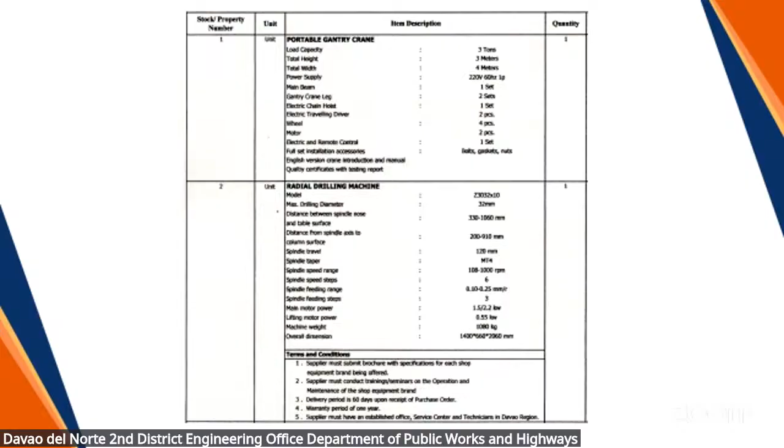First is the portable gantry crane and the radial drilling machine. So for the portable gantry crane, its specifications: for the load capacity, 3 tons, total height 3 meters, total width 4 meters, power supply 220 volts, 60 hertz, 1 phase. The main beam is 1 set.

The gantry crane leg, 2 sets. Electric chain hoist, 1 set. Electric traveling driver, 2 pieces. For the wheel, 4 pieces. For the motor, 2 pieces. Electric and remote control, 1 set. Full set installation accessories: bolts, gaskets, and nuts. The English version crane introduction and manual, and quality certificates with testing report.

So this is the example of the portable gantry crane. Second, for the radial drilling machine, specifications: model Z3032 by 10, with max drilling diameter 32 mm.

The distance between the spindle nose and table surface is 330 to 1060 mm. The distance from spindle axis to column surface is 200 to 910 mm. Spindle travel 120 mm, for the spindle taper MT4. Spindle speed range 108 to 1000 RPM, spindle speed steps 6. The spindle feeding range is 0.10 to 0.25 mm per revolution, spindle feeding steps 3. Main motor power 1.5 or 2.2 kilowatts, lifting motor power is 0.55 kilowatts. The machine weight is 1080 kilograms, and the overall dimension is 1400 by 660 by 2060 mm.

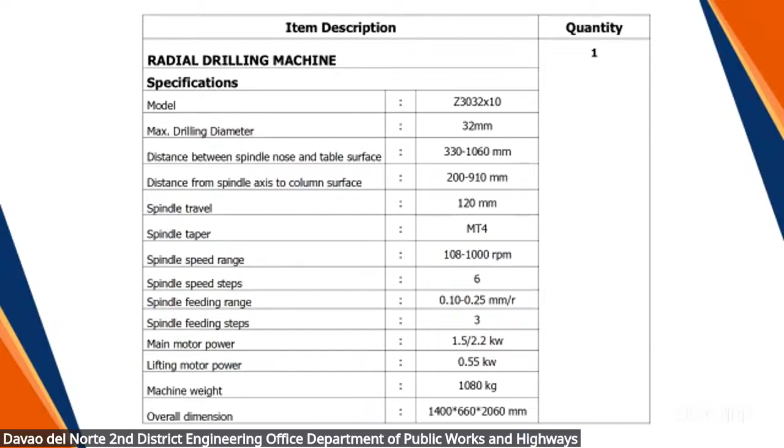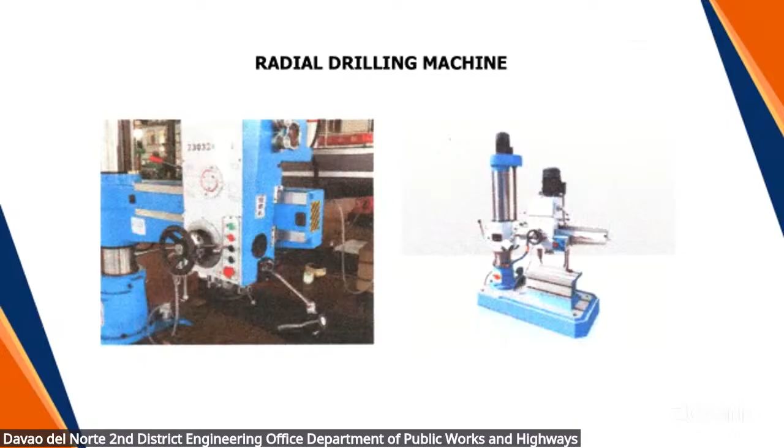This is the example of the radial drilling machine. So for the terms and conditions: first, supplier must submit brochure with specifications for each shop equipment brand being offered. Second, supplier must conduct trainings and seminars on operation and maintenance of the shop equipment brand. Third, delivery period is 60 days upon receipt of purchase order. Fourth, warranty period of 1 year. Last, supplier must have an established office, service center, and technicians in Davao region. That's all, sir.

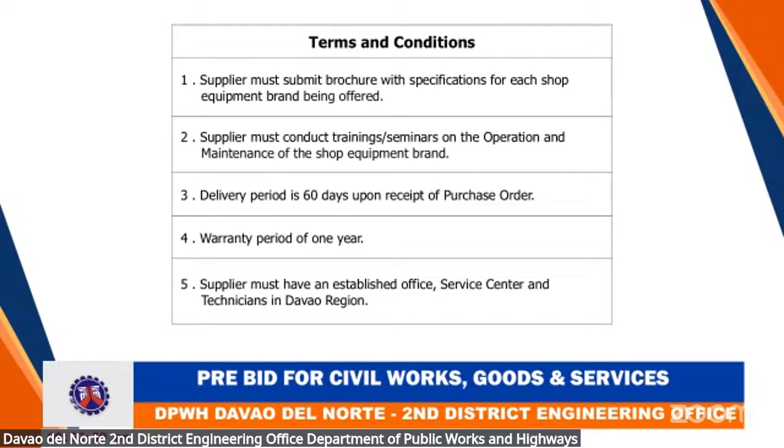Thank you for the presentation, sir. We have prospective bidders who are attending us online. So do we have any queries from our prospective bidders and the members regarding the rest of the contract project? Hearing none, thank you very much. Let us now proceed with the reading of the reminders for our prospective bidders.

The bidding documents were posted on the DPWH website and PhilGEPS. Changes will be posted in the Bid Bulletin and Notices.

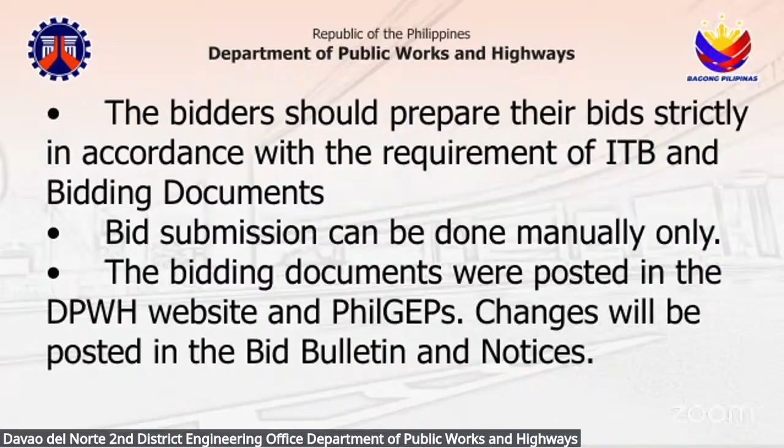For eligibility requirements, the basic eligibility requirement during the submission of bids is PhilGEPS. All bidders are reminded to maintain a current and separate file of their Class A documents in the PhilGEPS, and shall submit the PhilGEPS certificate of registration and membership to the procuring entity. Please be reminded that submission of updated Class A documents in its bid to support an expired certificate of PhilGEPS registration and membership is no longer acceptable.

For technical and financial requirements, the required documents enumerated in the checklist must be submitted. All notarized documents must be dry sealed and signed by its authorized signatory. Bid security must follow the required format and should be duly signed, notarized, and dry sealed. All data should be filled up, don't leave any blank in the form.

The bidder shall not change the entries under pay item number, pay item description, unit, and quantity set by the procuring entity in the financial proposal, to avoid being declared non-responsive. The Omnibus sworn statement shall follow the prescribed format. Any missing, incomplete, or patently insufficient document in the checklist is a ground for outright rejection of the bid.

The technical proposal shall comprise the following documents: field checks, statement of all ongoing contracts, single largest completed contract, technical specifications including delivery schedule, warranty certificate and brochure, manpower requirements if applicable, and after-sales support for parts.

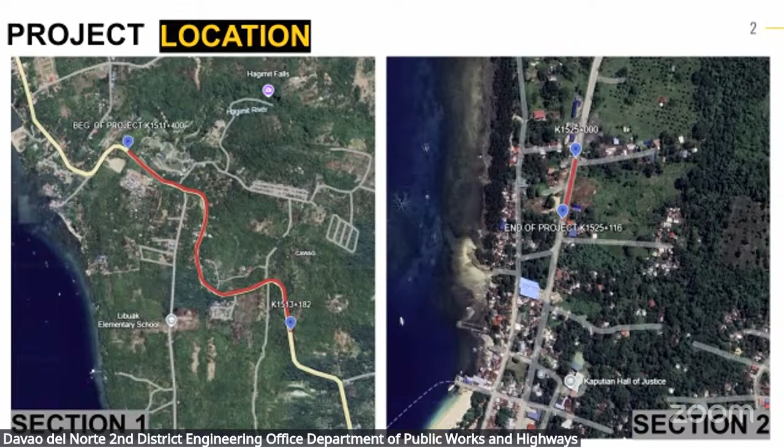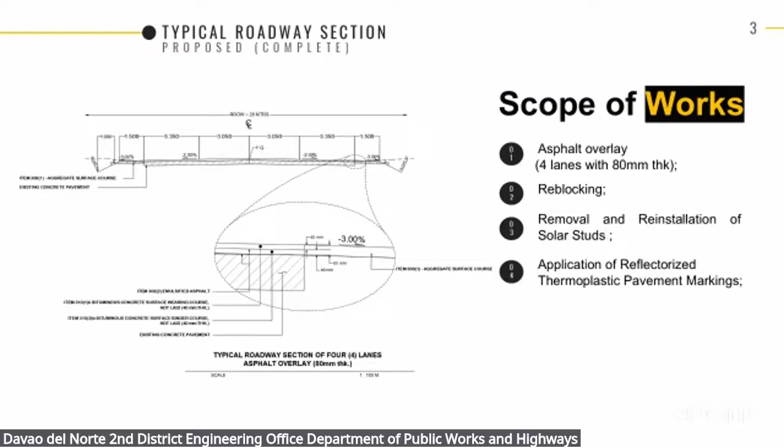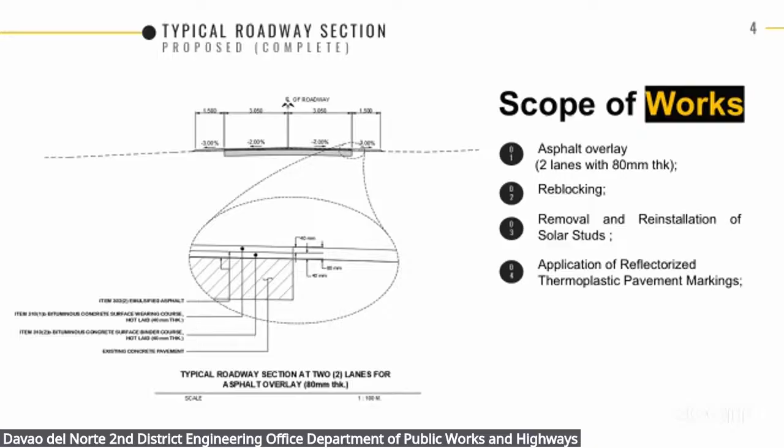Queries, comments from the members and the prospective bidders? Getting none, thank you very much for the presentation. We will now proceed to the next topic.

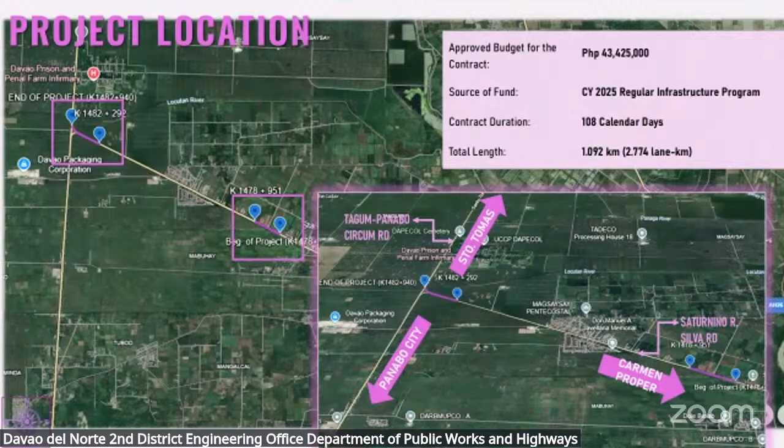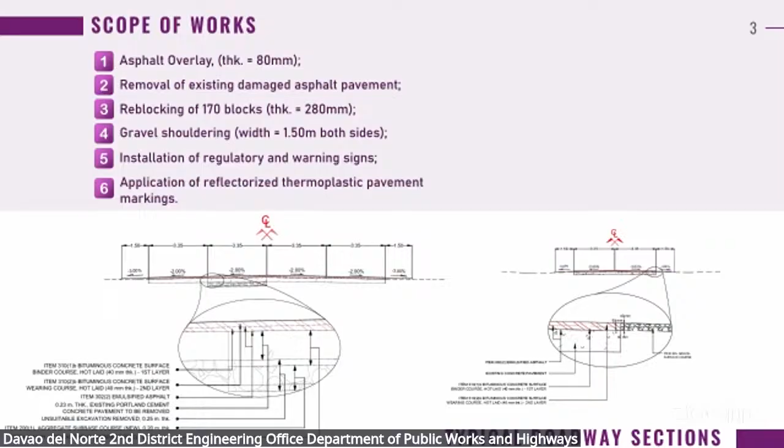And this is a typical roadway section. These are the total photos for the Saturnino-Silva road project.

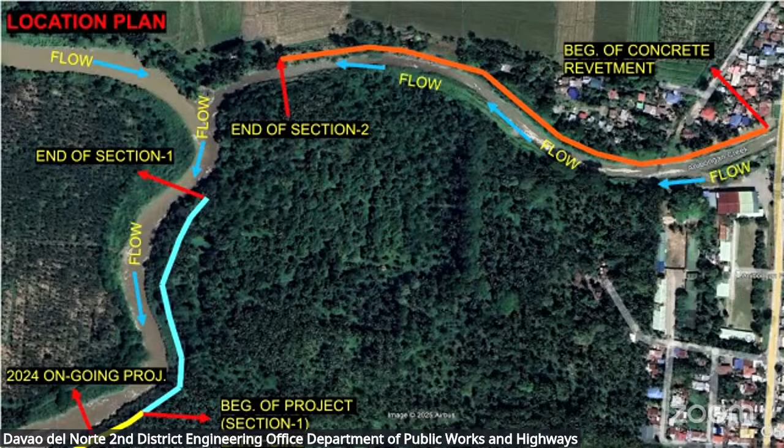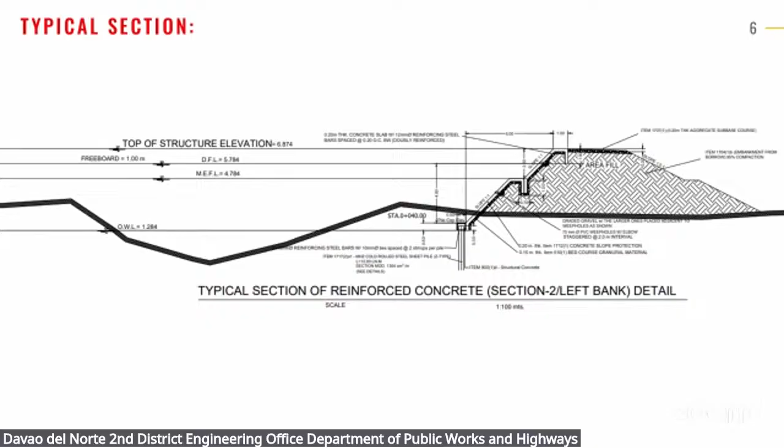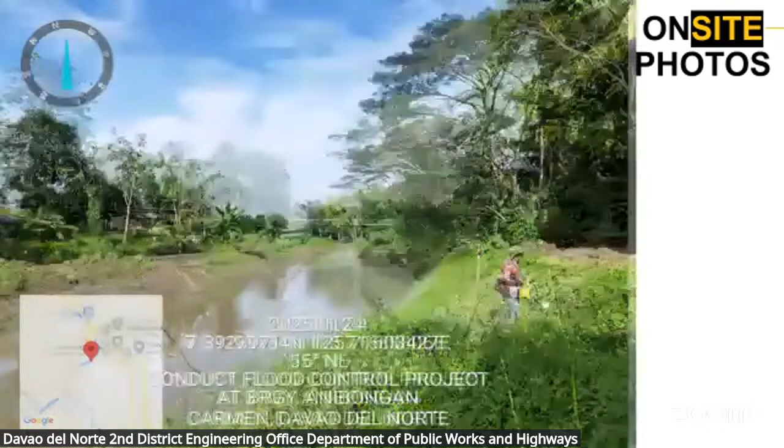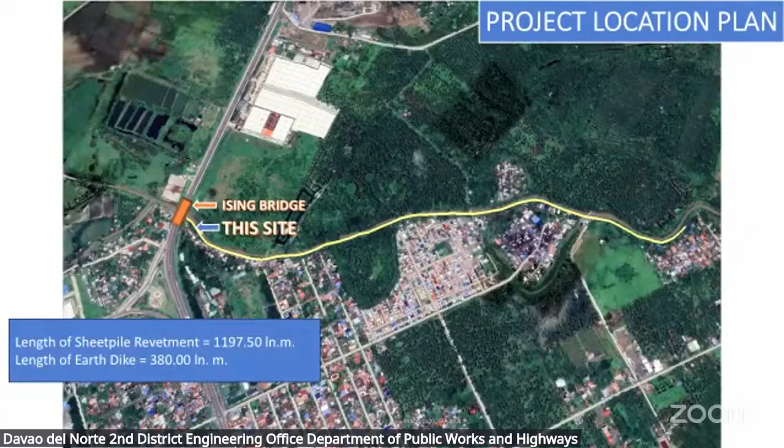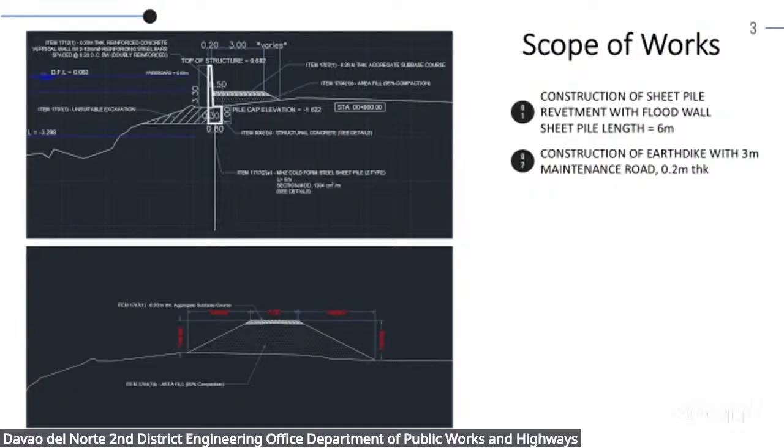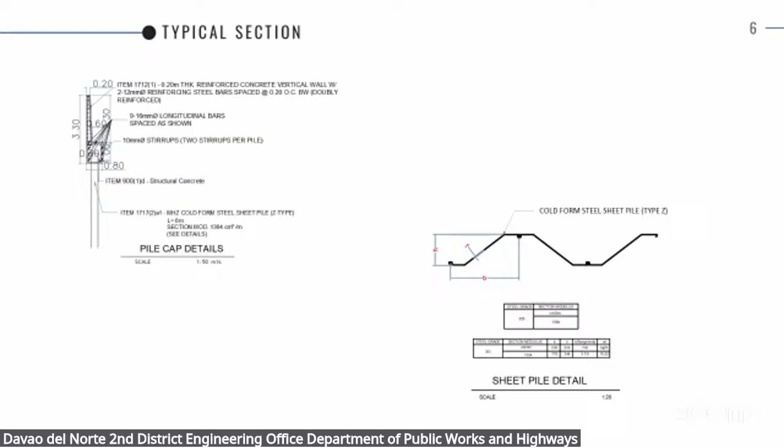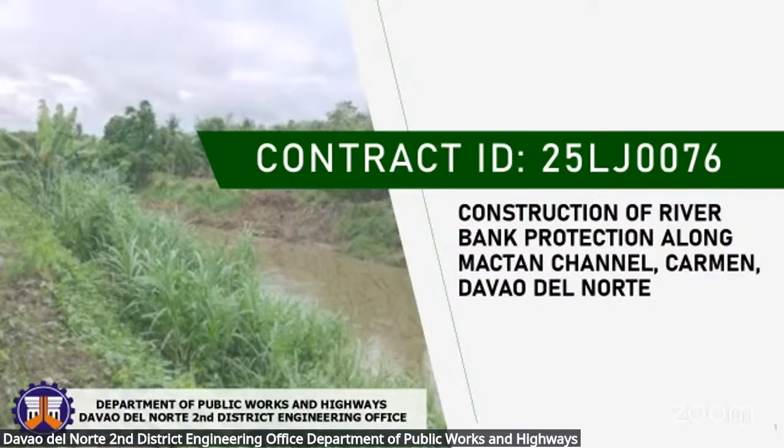Good morning, Mr. Chair. Good morning everyone. I will be presenting contract ID 25LJ0076: construction of river bank protection at Mactan, Carmen, Davao del Norte. So the ABC is 144,750,000. Source of fund is CY 2025 regular. Contract duration is 207 calendar days. Target length is 1,467.45 linear meters.

Scope of works: provision of 4x4 pickup type service vehicle for the engineer on bare rental basis, operation and maintenance of the 4x4 pickup type service vehicle for the engineer, construction survey and staking, project billboard and signboard, occupational safety and health program, mobilization and demobilization, removal of structures and obstruction, unsuitable excavation, shoring, cribbing and drain excavation, embankment from borrow, driving of Z-type sheet piles 12 meters, and construction of concrete slope protection.

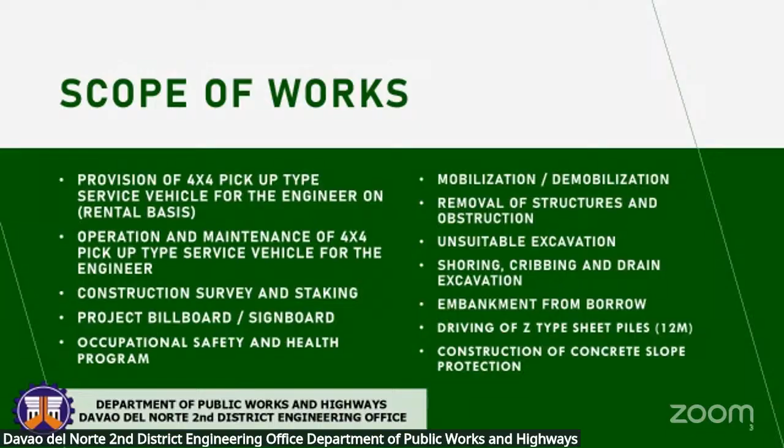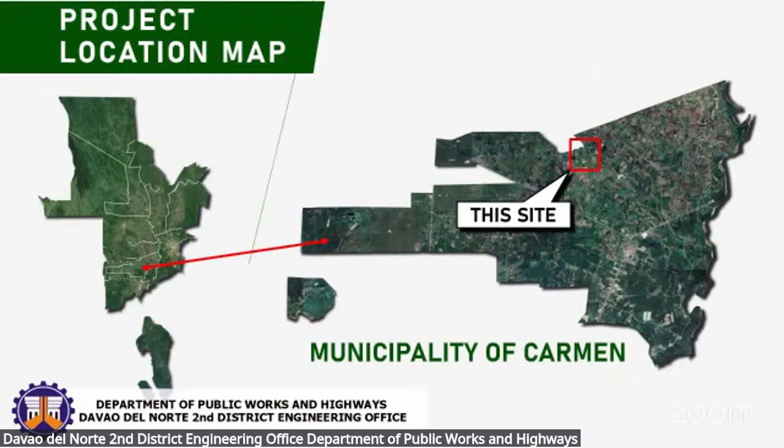So the location of the project is located in the municipality of Carmen. So this is the project location map. So for the project, the beginning of the project, yes.

Beginning of the project is section 1, beginning of project, represented at station 0+00. And the end of section 1 is the end of concrete revetment. Station 0+514.5 is also the beginning of section 2 and beginning of earth dike. And the end of section 2 is at station 1+040. And the beginning of section 3 is at station 1+280. The end of project is at station 1+507.45.

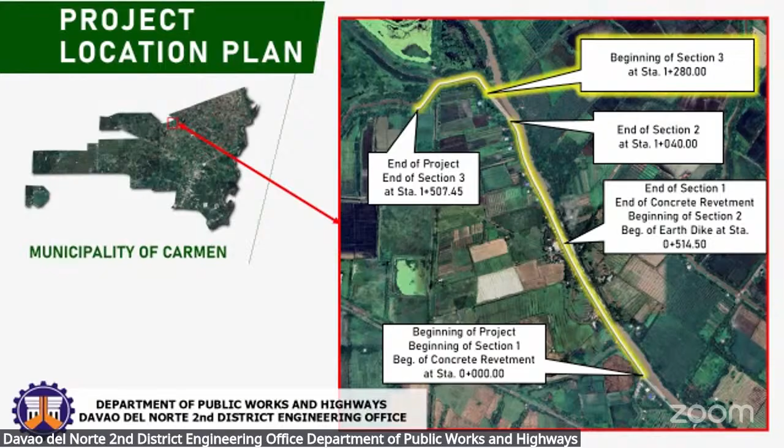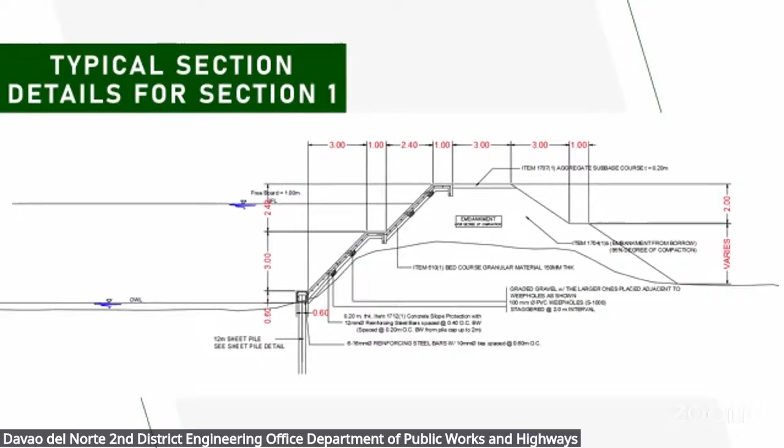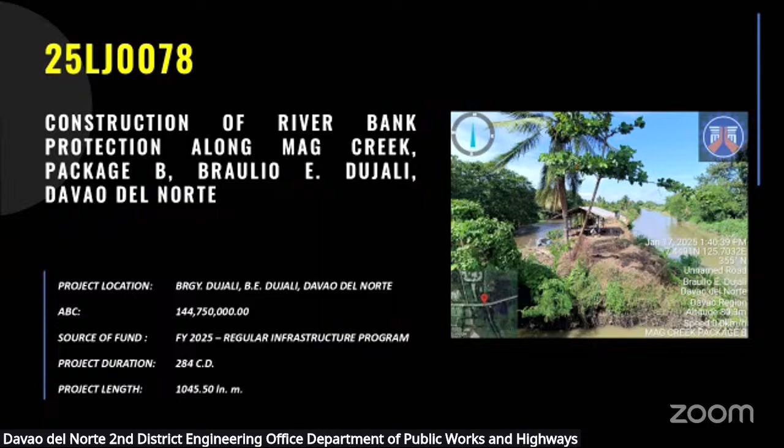The project duration is 284 calendar days. The project length is 1,045.50 linear meters.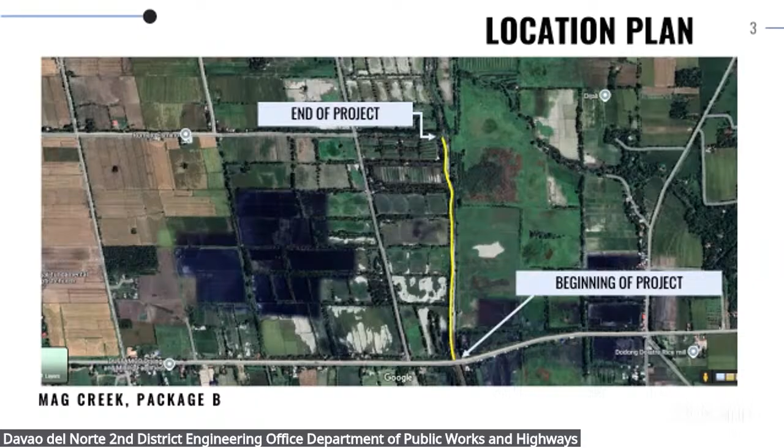This is the location plan. This is the vicinity verification plan. This is the scope of works and typical section of the project.

Construction of reinforced concrete revetment with an 8-meter cold formed sheet pile Z-type installation of 48-inch diameter RCPC with flood gate.

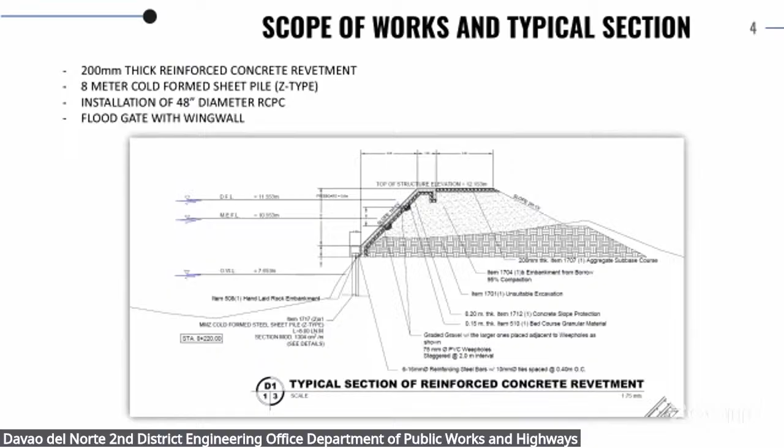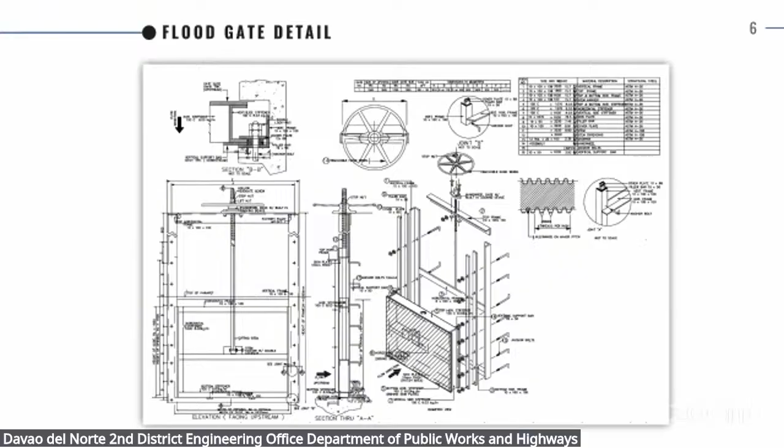This is the site photos of the project.

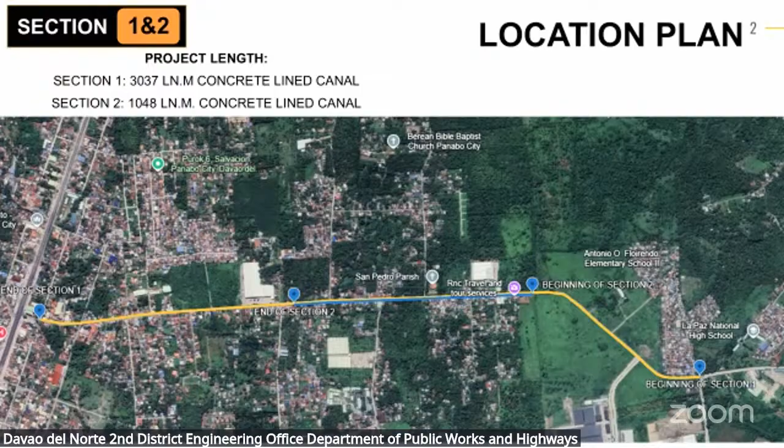It is 3,037 linear meters of concrete lined canal. Section 2 is 1,048 linear meters of concrete lined canal.

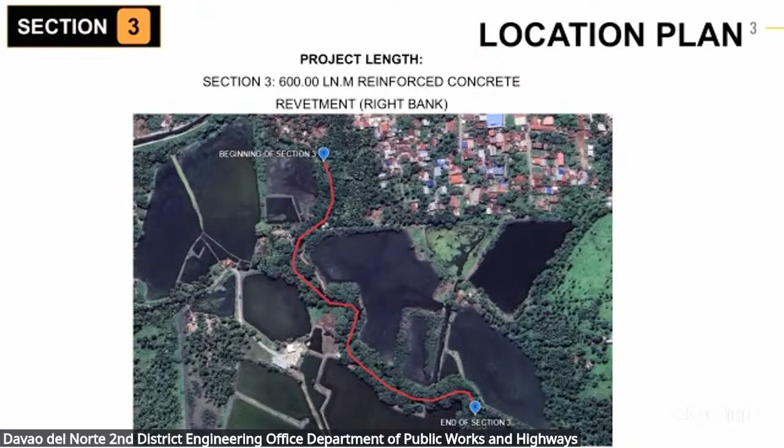For section 3, concrete revetment, 600 linear meters in length on the right bank. Then section 4, installation of 12 linear meters of Japanese box culvert.

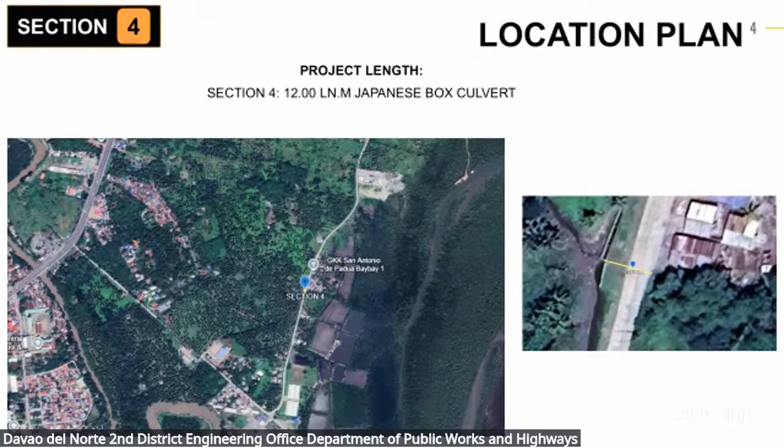Scope of works: construction of concrete lined canal, construction of reinforced concrete revetment with steel sheet piles, length of 3 meters, and construction of box culvert.

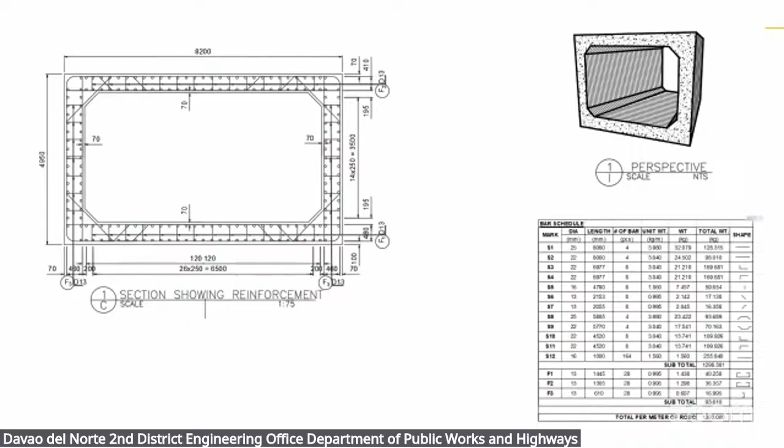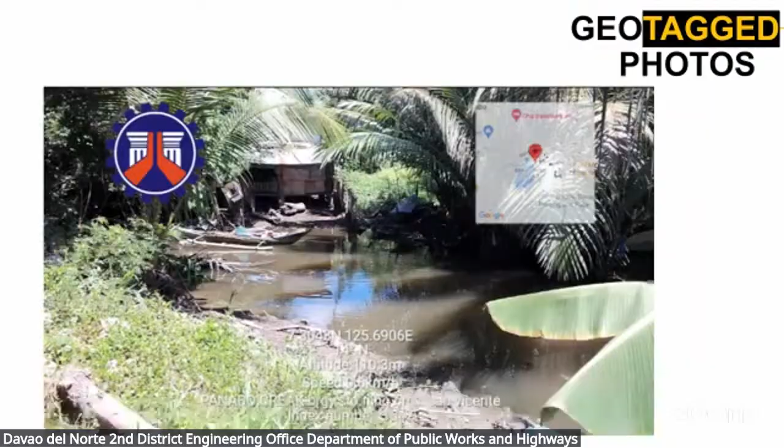These are the site photos.

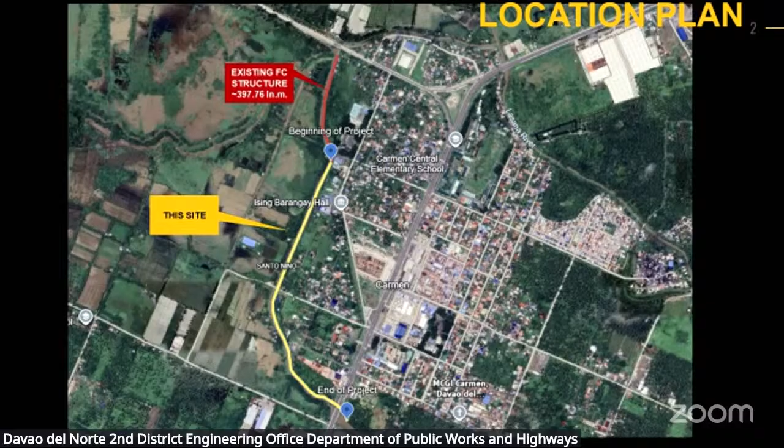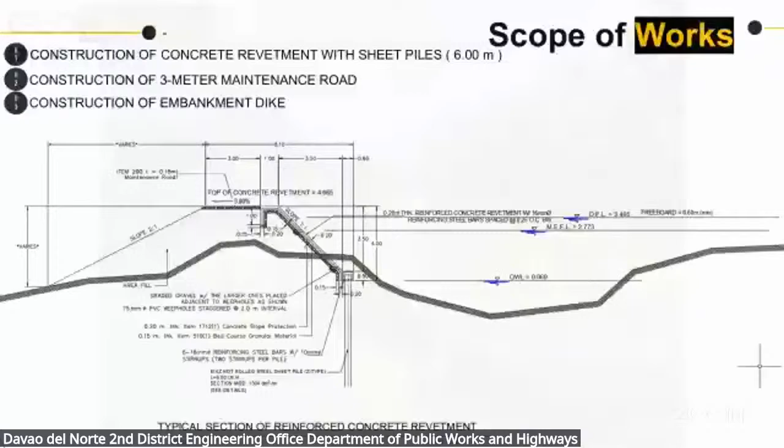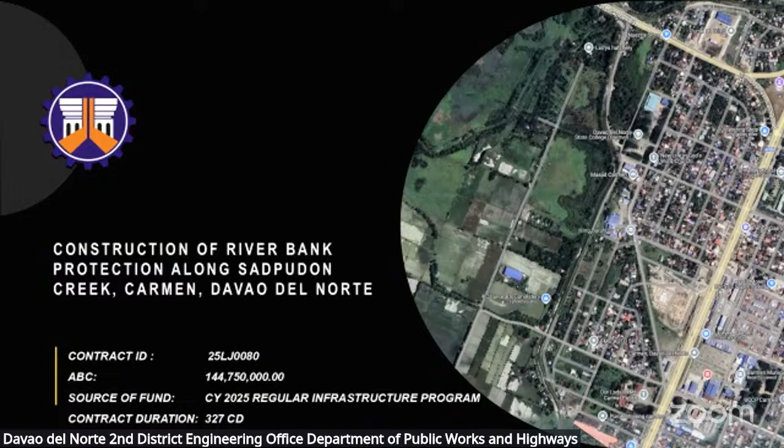I am Engineer Braulio. Once again, I will be presenting contract 25LJ0081. The title is Construction of River Bank Protection along Mangalcal Creek, Carmen, Davao del Norte.

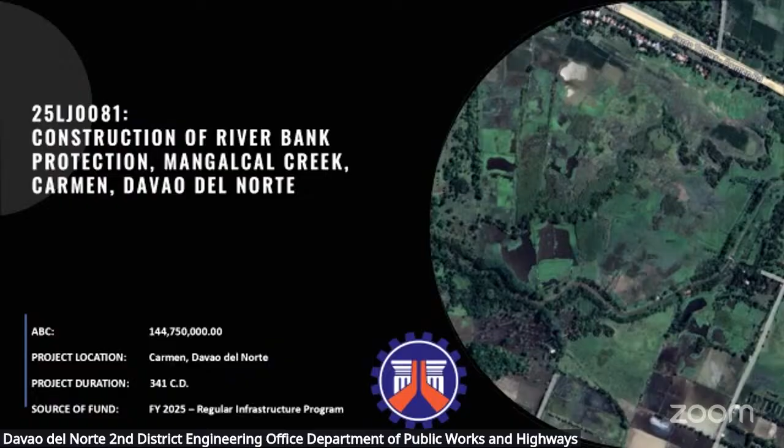The requested ABC is 144,750,000 pesos. Located in Carmen, Davao del Norte, with a duration of 341 calendar days, source of fund FY 2025 regular infrastructure.

So this is the location plan. The yellow line is the existing, while ongoing construction of proposed structure.

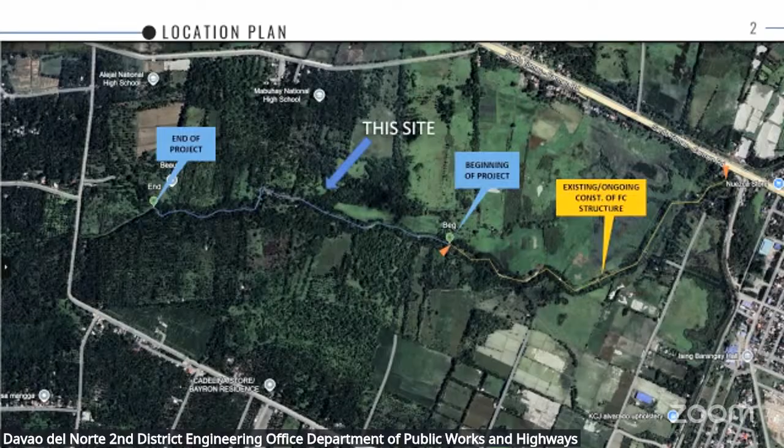For the scope of work, the typical section is a construction of earthdike with 3 meters thickness, and the distance of the earthdike from the bank is 10 meters both sides.

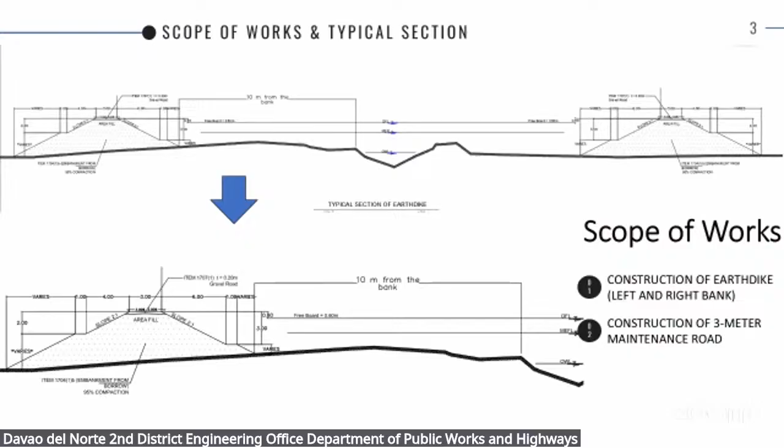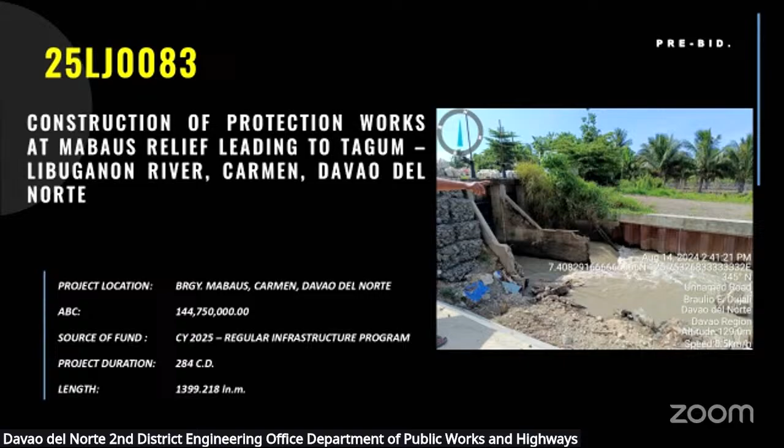The project duration is 284 calendar days. The project has a length of 1,399.21 linear meters. This is the project location plan.

This is the typical section for concrete revetment and scope of work. The scope of work is construction of concrete revetment with 6-meter deep Z-type sheet piles, construction of single barrel box culvert and flap gate.

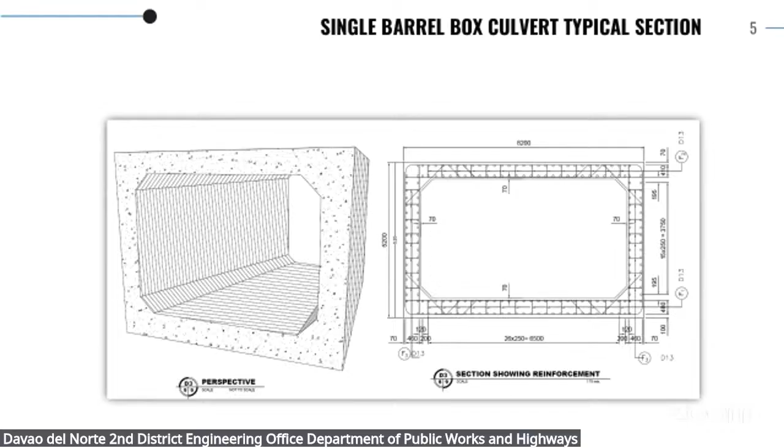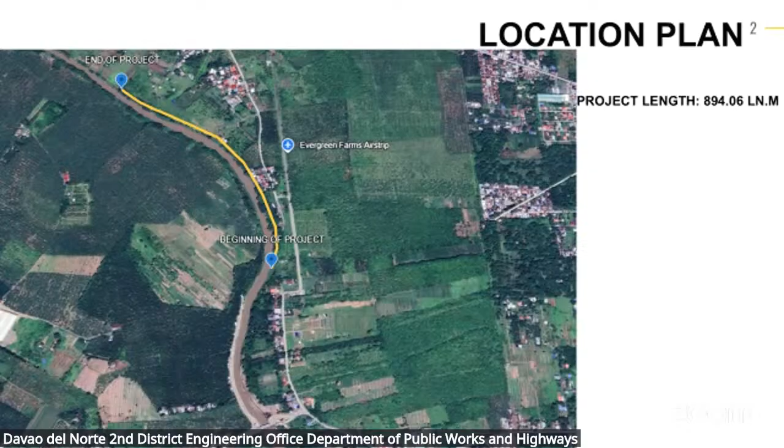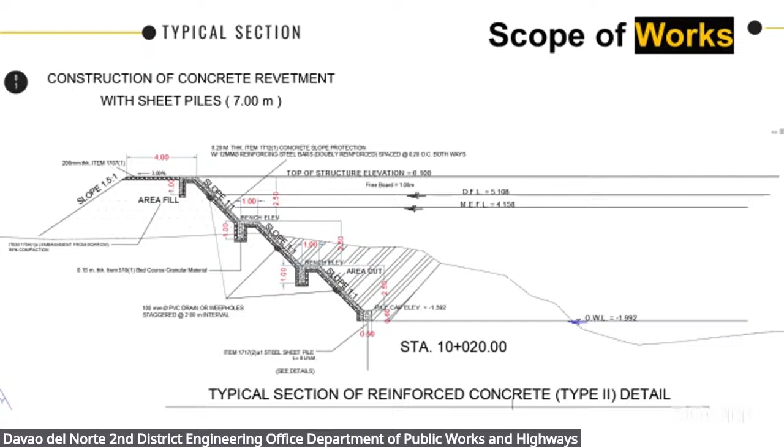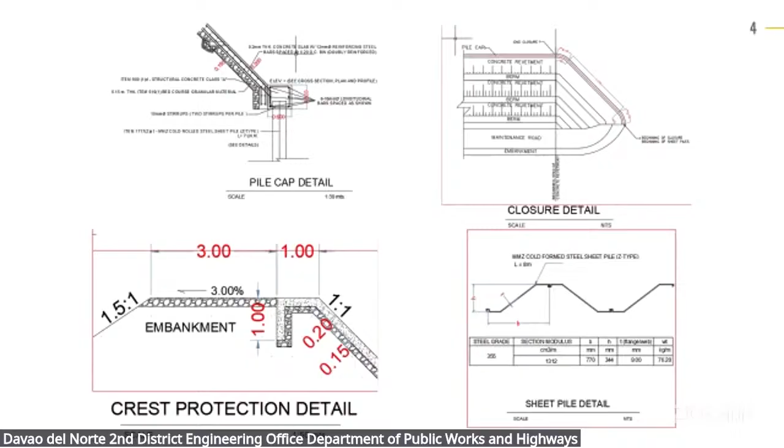Scope of work: construction of concrete revetment with steel sheet piles, length is 7 meters. These are the typical sections of the concrete revetment. These are the details: the pile cap detail, the closure detail, the crest protection detail, and sheet pile detail. These are the on-site photos.

End of presentation.

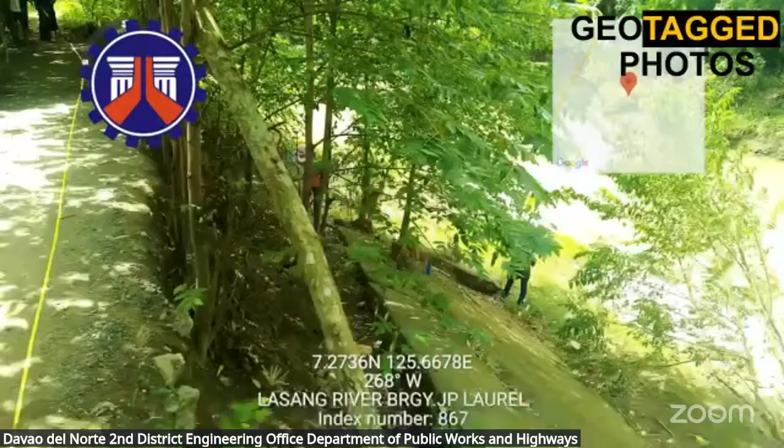This is section 1. Scope of works: construction of concrete revetment with steel sheet piles, 10 meters. This is the typical section of the concrete revetment. This is the pile cap detail, closure detail, and sheet pile detail. This is the currently damaged concrete revetment in section 1.

End of presentation.

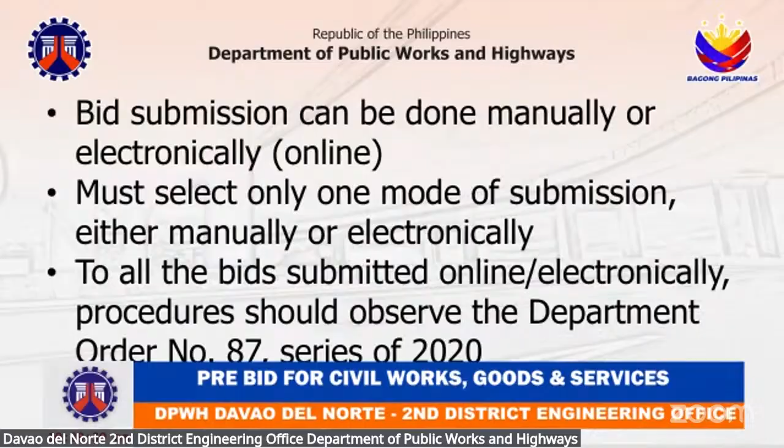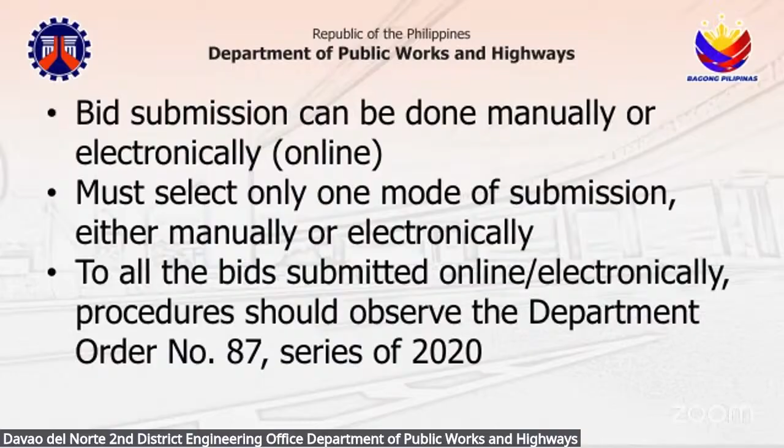Bid submission can be done manually or digitally online. Bidders must select only one mode of submission, either manually or electronically. For bids submitted online or electronically, procedures to observe are per Department Order number 87, series of 2020. For eligibility requirements, bidding is done through electronic evaluation using CIVIL.

All bidders are reminded to maintain a complete and updated file of their Class A documents in the PhilGEPS and shall submit the PhilGEPS certificate of registration and membership to the procuring committee. Please be reminded that submission of updated Class A documents is required; expired contractor's confidential certificate of platinum registration and membership is no longer acceptable.

For technical and financial requirements, the required documents enumerated in the checklist must be submitted. All notarized documents must be dry sealed and signed by their authorized signatory. Bid security must follow the required format and should be duly signed, notarized, and dry sealed. The list of key personnel should include the list of all projects they are involved in. Key personnel should have the required experience and qualifications if applicable.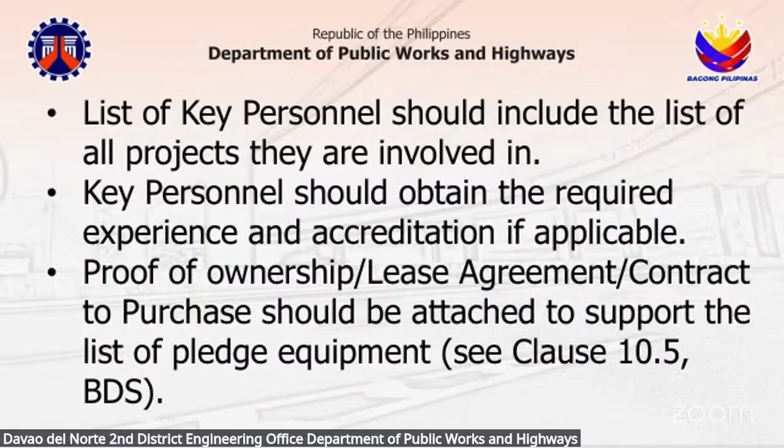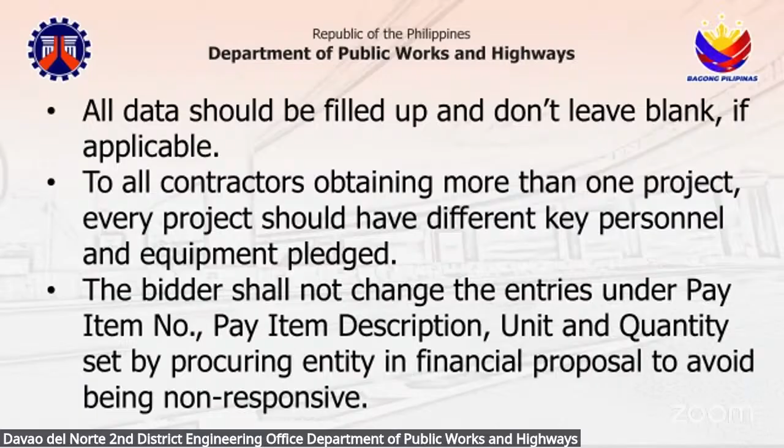Proof of ownership, lease agreement, or contract to purchase should be attached to support the list of pledged equipment. All data should be filled up and should not be left blank when applicable. For contractors obtaining more than one project, every project should have different key personnel and equipment pledged. The bidder shall not change or increase the item number, item description, unit, and quantity set by the procuring entity in the financial proposal to avoid being declared non-responsive.

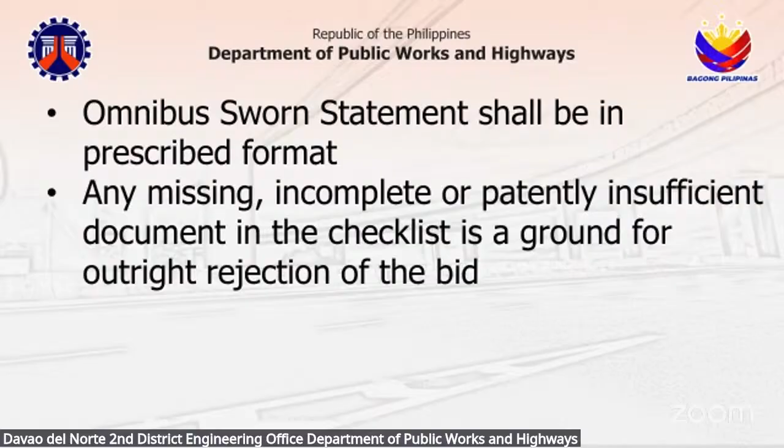The sworn statement shall be in the prescribed format. If there is a missing, incomplete, or patently insufficient document in the checklist, this shall be grounds for outright rejection of the bid.

For the technical proposal, it shall comprise the following documents: PhilGEPS certificate, if joint venture, special PCAB license and the joint venture agreement; bid security; duly signed organizational chart for the contract; duly signed contractor's list of key personnel for the contract; duly signed list of contractor's major equipment; omnibus sworn statement under RA 9184, IRR section 25.3 revised, signed and notarized.

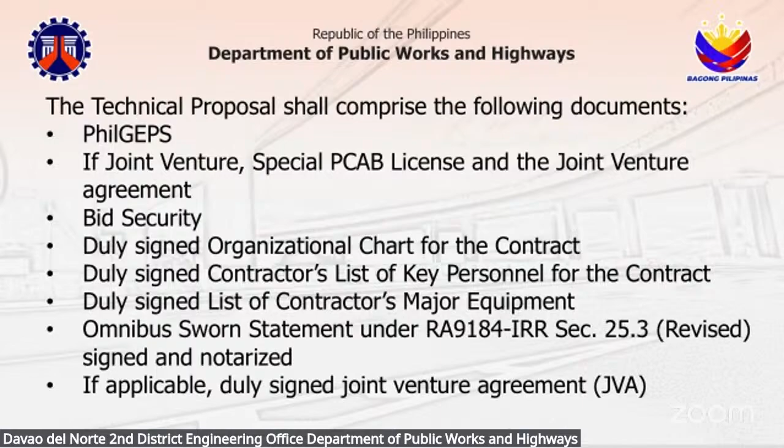If applicable, duly signed joint venture agreement or JVA. The financial proposal shall contain the following: duly signed bid form, duly signed bid prices in the bill of quantities, duly signed detailed estimates, duly signed cash flow by quarter.

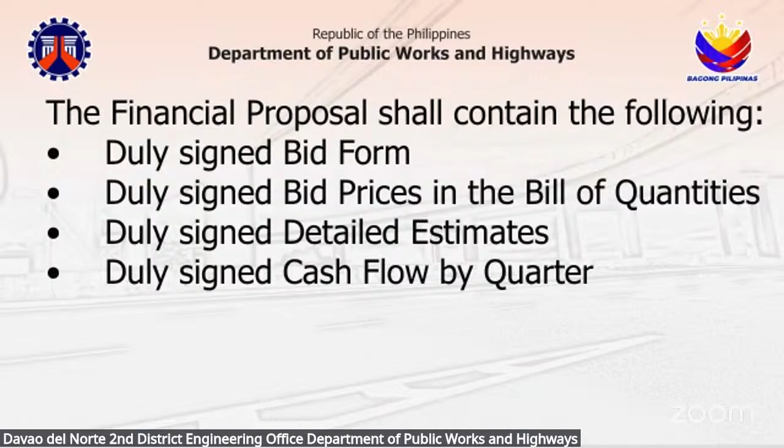This list covers contractor's labor, construction, and lab equipment units, whether owned, leased, and/or under purchase agreements, supported by proof of ownership or lease/purchase, and certification of availability of equipment from lessor or vendor for the project duration. See clause 10.5 BDS. As per DO 58 series of 2012, all prospective bidders are mandated to state in their bid documents a complete technical description of their pledged equipment, whether owned or leased, such as but not limited to the engine number, year model, chassis number, plate number, production capacity, and load capacity. In addition, prospective bidders should also state in their bid documents the particular place or site where the equipment is located, as provided under DO number 9 series of 2012. If any piece of equipment is not in the declared location, the bidder shall be post-disqualified. Failure of a prospective bidder to comply with these requirements shall result in the bidder's automatic post-disqualification for award of contract and forfeiture of its bid.

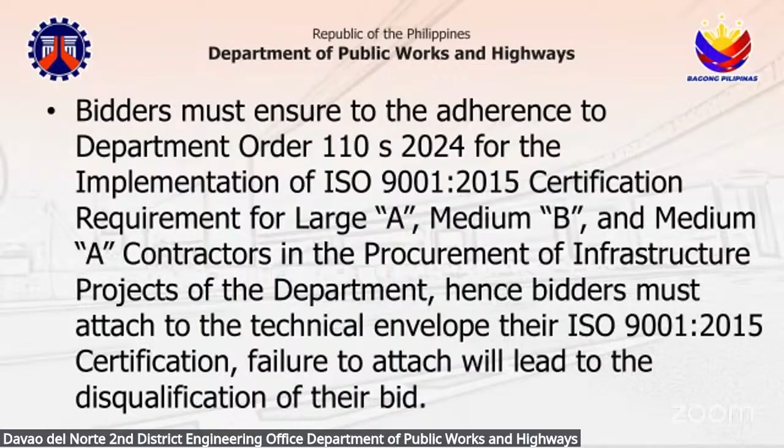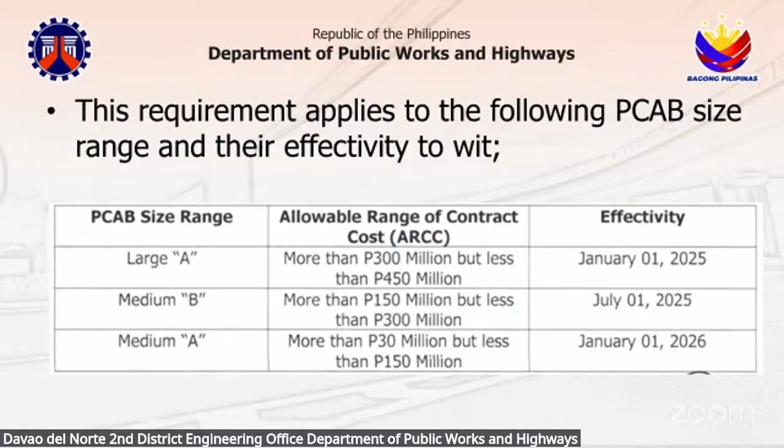This requirement applies to the following size range and effectivity: Large A, Allowable Range of Contract Cost (ARCC) more than 300 million pesos but less than 450 million pesos, effectivity January 1, 2025. Medium B, ARCC more than 150 million pesos but less than 300 million pesos, effectivity July 1, 2025. Medium A, ARCC more than 30 million pesos but less than 150 million pesos, effectivity January 1, 2026. Pursuant to DO 227 series of 2024 and DO 148 series of 2024, only accredited project engineers may be assigned to DPWH building and bridges projects, subject to the following limits of assignment.

For provisional project engineer, 10 contracts located within the same region for simultaneous assignments, each costing not more than 100 million pesos, but with an aggregate cost of 500 million pesos.

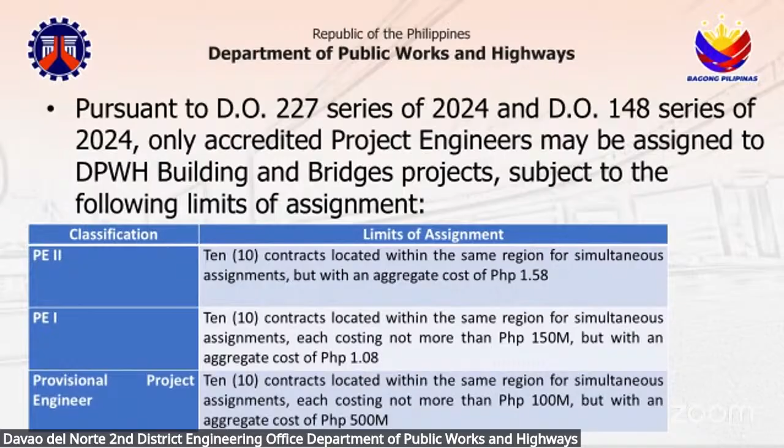For the agreement on criteria for eligibility screening, preliminary examination and evaluation of bids, post-qualification and award, the bank adopts the non-discretionary pass-or-fail criteria and procedures for the preliminary examination of bids, detailed evaluation of bids, post-qualification and award, in accordance with the 2016 revised implementing rules and regulations (IRR) of RA 9184, as amended. The no contact rule shall be observed.